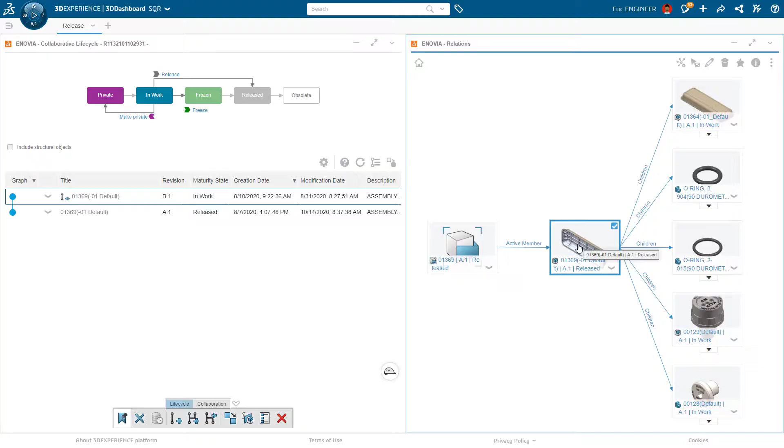Storing, managing, and collaborating on design data is a challenge every company faces. Now, with many more teams working remotely, there are questions on everyone's mind like, how can we securely centralize our data, improve collaboration, all while maintaining our design tool of choice, SOLIDWORKS.

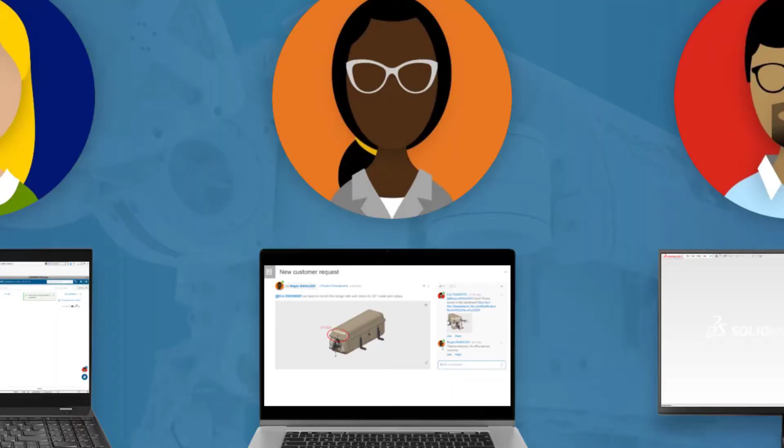Combining SOLIDWORKS with ENOVIA's out-of-the-box Cloud PLM is exactly what companies need to be productive right away. Let's follow a small design team to see what it looks like to connect SOLIDWORKS Desktop to the cloud.

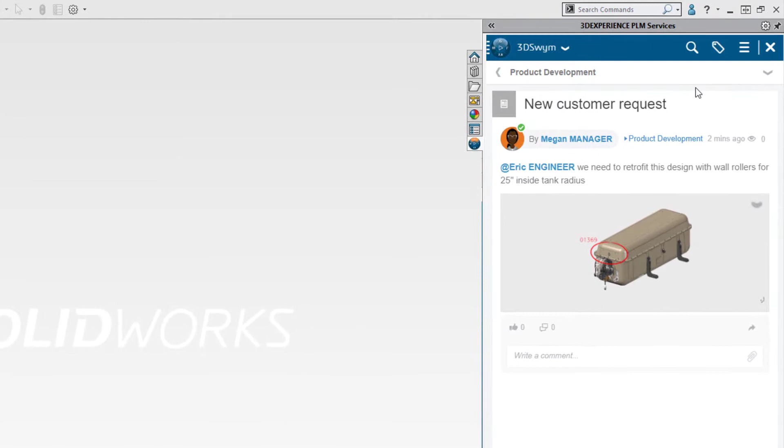Eric the engineer starts his day working in SOLIDWORKS Desktop. He logs into the 3D Experience platform and sees an incoming message notification. His manager, Megan, is asking him to modify an existing assembly for a new customer request. He searches for the related CAD model and drags it into his SOLIDWORKS session.

It's just that simple to access his SOLIDWORKS data that's stored on the 3D Experience platform. Marking the assembly as reserved gives him write access. He's made his design changes, but before saving back to the cloud, he wants to know where this assembly is used. The Relations window gives a graphical view of all the parent-child dependencies.

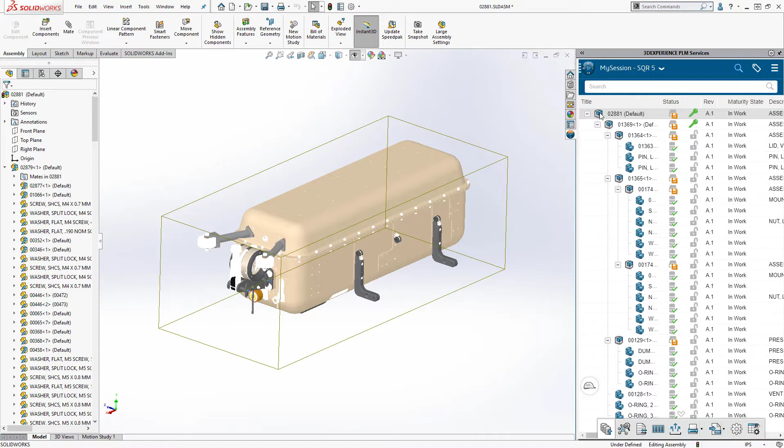Here's the top-level assembly, which he opens in lightweight mode. That's a big time saver for the large models Eric usually works with. With the full assembly up to date, he reserves it and clicks Save. Eric creates a new revision now that the rollers have been added.

Despite this being a pretty large assembly, save time is efficient because only the models that have changed need to be saved to the cloud. That was easy. In fact, his team was productive from day one because connecting their data to the cloud required no customization or special setup.

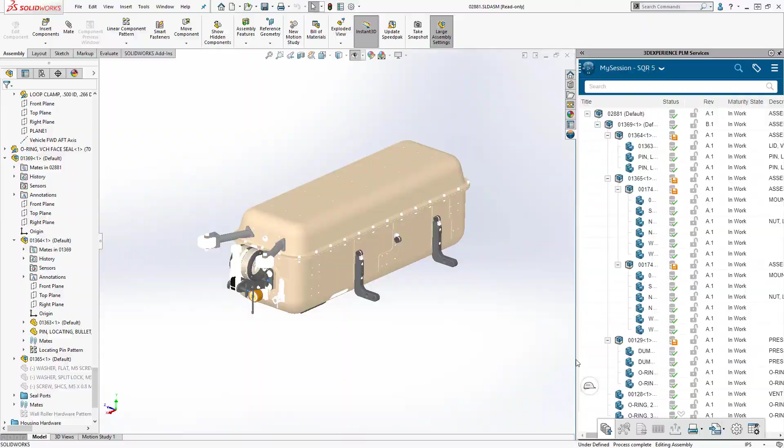Later on, Eric still has some work to do that doesn't require modeling in SOLIDWORKS. All his 3D Experience apps are accessible from any browser, and with his data safely in the cloud, he has the freedom and mobility to keep working from just about anywhere on any device.

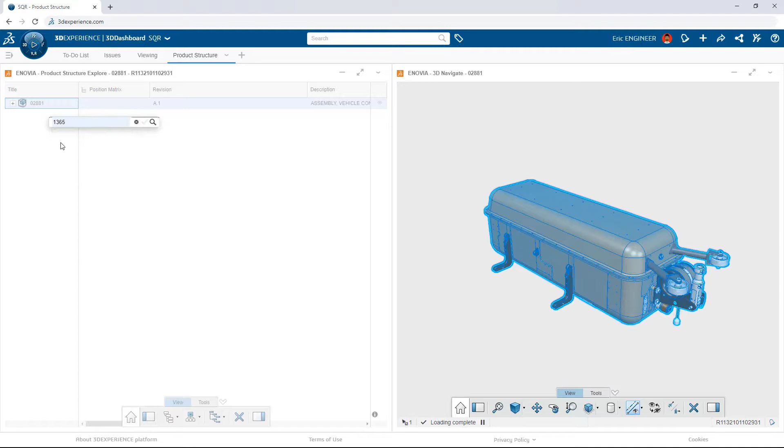He loads the top assembly into the Product Structure Explore. This app shows a graphical view and list view at the same time without tying up a CAD license. He filters the display to highlight the newly added roller assembly and attaches a supporting document, in this case a PDF with installation instructions.

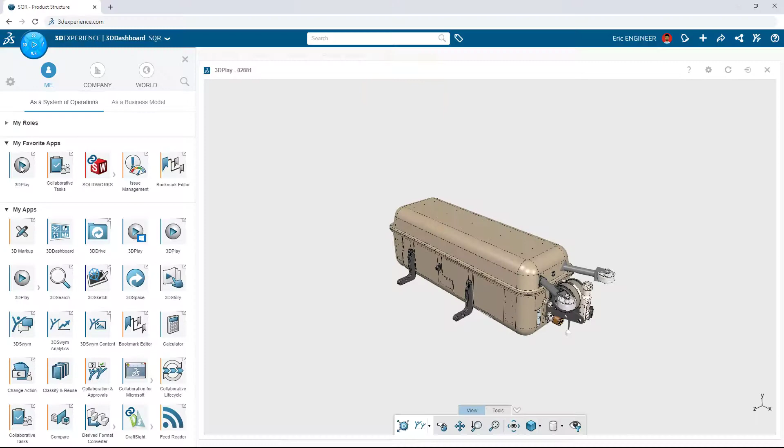Now it's time to give Megan an update on his progress. Instead of an email or phone call, Eric tailors an interactive dashboard that will have exactly the information he wants her to review. First, he adds the 3D Play viewing app, preloaded with the top-level assembly. He also grabs a screenshot he can post back to the discussion thread.

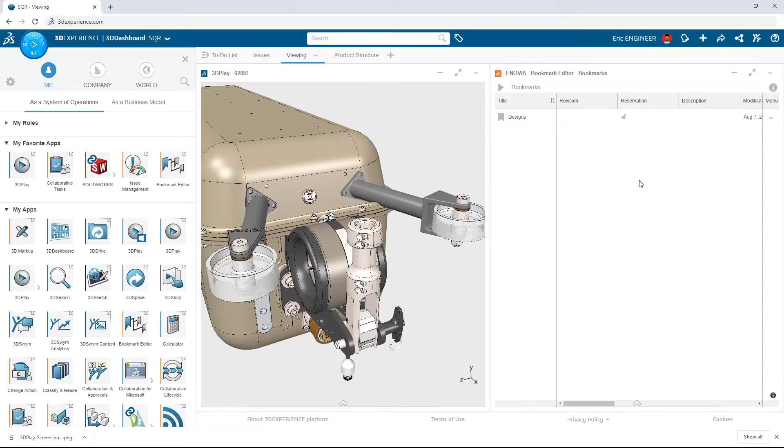Next, he launches the Bookmarks app, which is a convenient way of organizing shortcuts to frequently used items. His manager likes this because it keeps her most important data right at her fingertips. When he's ready to share the dashboard, he just copies the link.

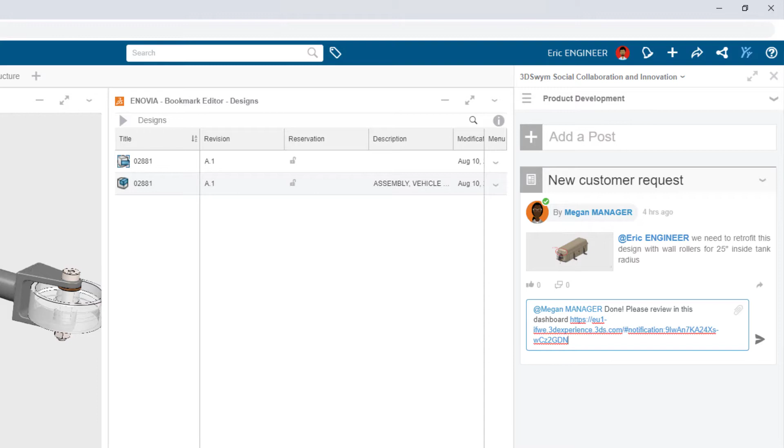Eric notifies his manager by posting back to the original discussion thread. He adds a comment, pastes the link to the shared dashboard, and inserts a screenshot of the latest design.

When you connect SOLIDWORKS to the 3DEXPERIENCE platform, it's the best of both worlds, cloud and desktop. SOLIDWORKS plus ENOVIA gives you a fast and easy way to store, manage, and share design data with the convenience and security of the cloud. There's little to no setup required, so you can be productive right away.

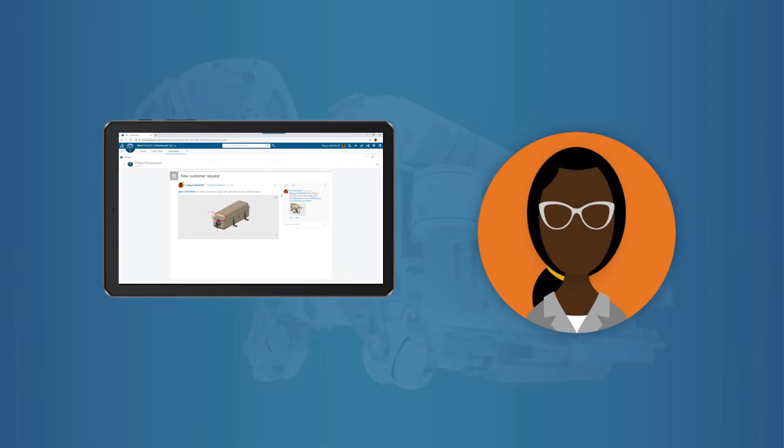Connecting SOLIDWORKS to the 3DEXPERIENCE platform provides an easy way for companies to store and secure their data on the cloud. But that's just the start. For non-CAD users like Megan, the engineering manager, it gives her a simple, browser-based approach to streamline collaboration. Let's see how she uses the 3DEXPERIENCE platform apps to manage her team's activities more efficiently.

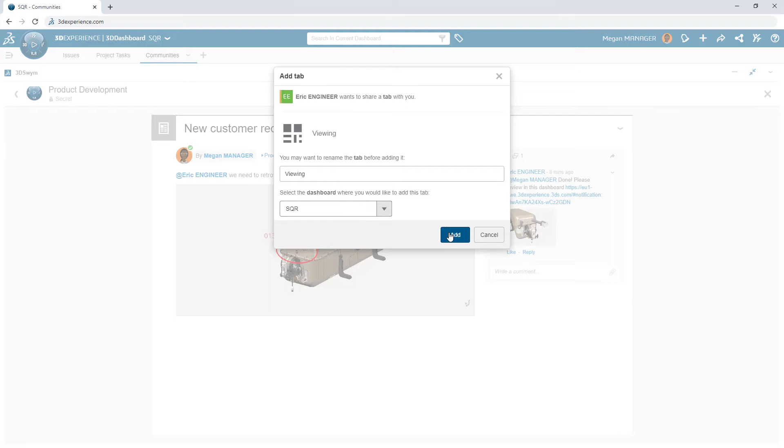Megan opens her browser and sees Eric has replied to her discussion thread requesting a new design proposal. He's included a link that she can add to her existing dashboard. The 3DPlay viewing app and Bookmarks app are preloaded with the data Megan needs to review his latest design. That saves her time and eliminates costly communication errors.

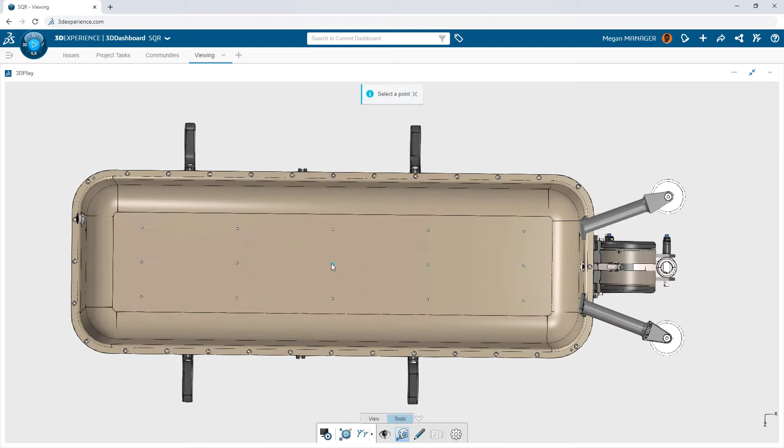Fully interactive viewing of even the most complex 3D models is a breeze on any device, especially touchscreens. There's no special hardware required and no CAD license needed. Megan uses a measure tool to verify the proper radius on the wall roller assembly.

Looking closer at the roller arms, she wonders if there might be excessive twisting without some kind of support member between them. So she logs an issue. It's just one of many ways the team can track problem reports or change requests.

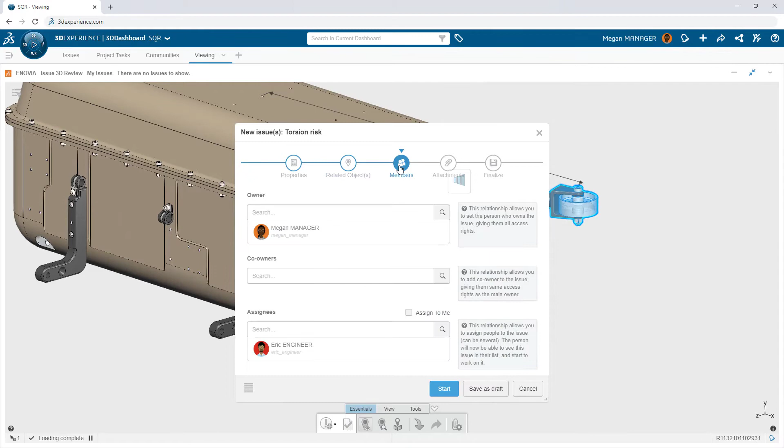She tags the related 3D models and assigns the issue to Eric, who will automatically be notified through the platform. No emails or phone calls required. It's such a more streamlined way to collaborate.

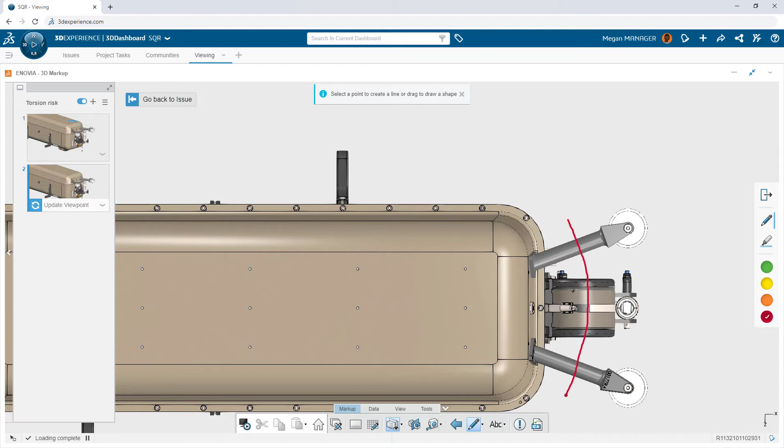To better document her idea, she can mark up the 3D model with various annotations in multiple views. This will give Eric a single source of truth as he gets to work on the redesign.

Meanwhile, Megan needs someone to add the hardware kit and create a drawing for the wheel roller assembly. She creates a task. It's like a self-contained to-do list with description and due date. She assigns it to Debbie Designer and attaches the proper SOLIDWORKS assembly so Debbie has everything she will need to get to work.

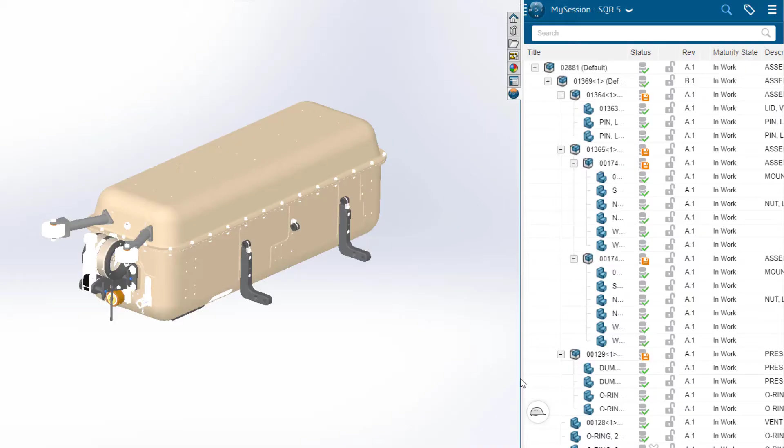Connecting SOLIDWORKS to the 3D Experience platform helps you streamline collaboration, all from a browser on any device with no software to install. You can extend the utility of your SOLIDWORKS data to non-CAD users and eliminate dozens of other disconnected solutions, improving productivity and providing clearer focus for everyone involved.

The 3D Experience platform is great for connecting SOLIDWORKS data to the cloud and improving collaboration, but when deadlines are tight, multiple designers often need to access the same SOLIDWORKS models at the same time. Not having proper write permission, accidentally overwriting someone else's work, these things happen all the time.

Eric and Debbie need to work in SOLIDWORKS on the same assembly, in parallel to meet their deadline. Let's see how ENOVIA's out-of-the-box PLM enables a more seamless, error-free approach to concurrent design. Debbie needs to add hardware and create a detailed drawing her manager can present to the customer. She uses her task list to organize the work that's been assigned to her, without ever leaving SOLIDWORKS.

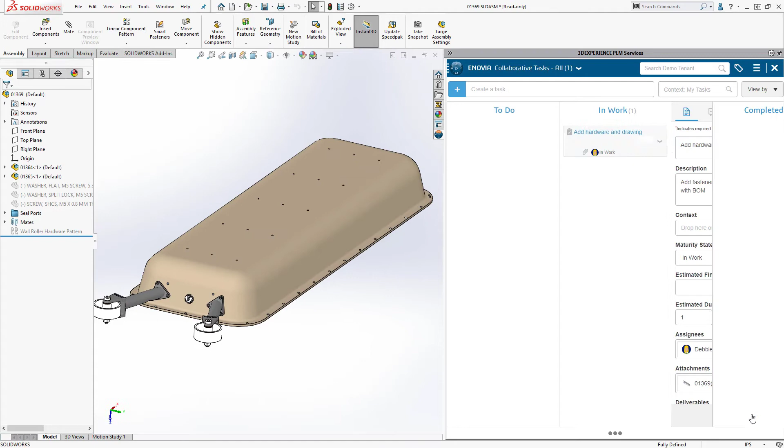Since Megan already attached the CAD assembly, Debbie won't have to waste time searching for files. She reserves the top-level assembly for write access. All the other subcomponents are still available for anyone else to work on. She's added the fastener kit and saves to the cloud, so any other users will be able to see her latest updates. Next, she lays out a 2D drawing with a bill of material.

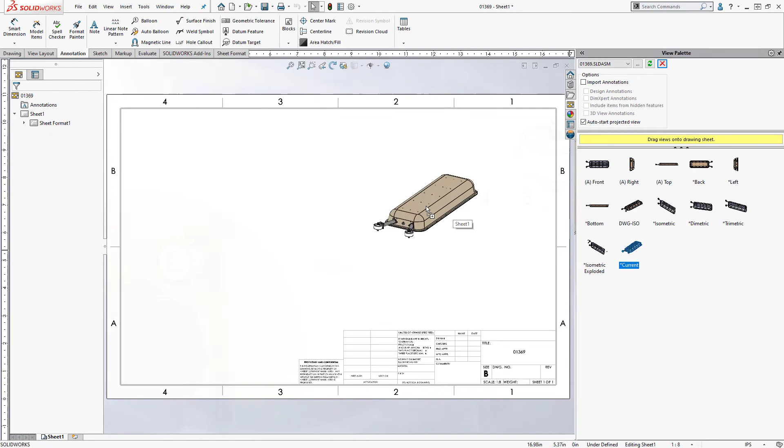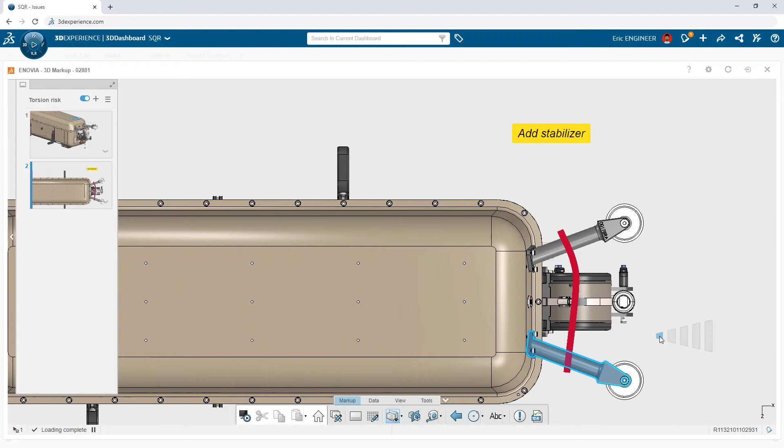Meanwhile, Eric has been assigned to tackle a structural issue with the design. The issue management app tracks the life cycle of the issue and provides a convenient way to organize and access all the associated data, all from his browser. He starts by reviewing the attached 3D markup. He sees the notes and clicks through the 3D geometry to verify the proper assembly, which he can open directly into SOLIDWORKS.

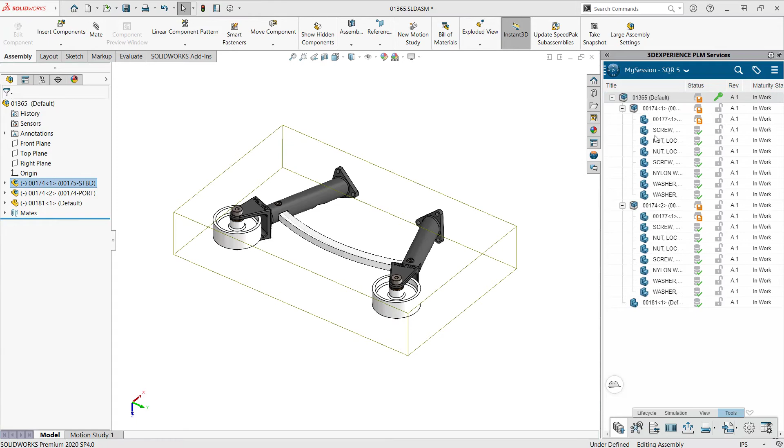Eric sees Debbie already has the assembly reserved. That's okay. At the same time, he reserves the roller assembly so he can add a stabilizer. There's no danger of overwriting each other's work. When he tries to save the assembly, he sees there are subcomponents that also need saving that he didn't reserve.

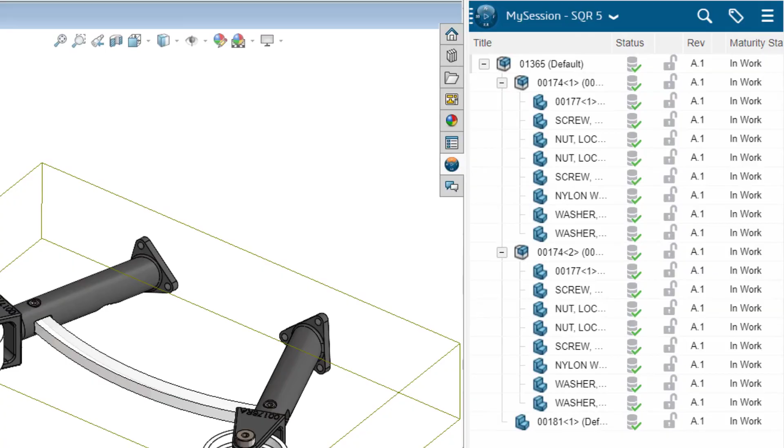With the 3D Experience platform, trouble-free data management is built right in. The software automatically gives write access to those additional files without interrupting anyone's workflow. Now the assembly is up to date and safely uploaded to the cloud. Back in his browser, Eric moves the issue status to in approval for Megan to review.

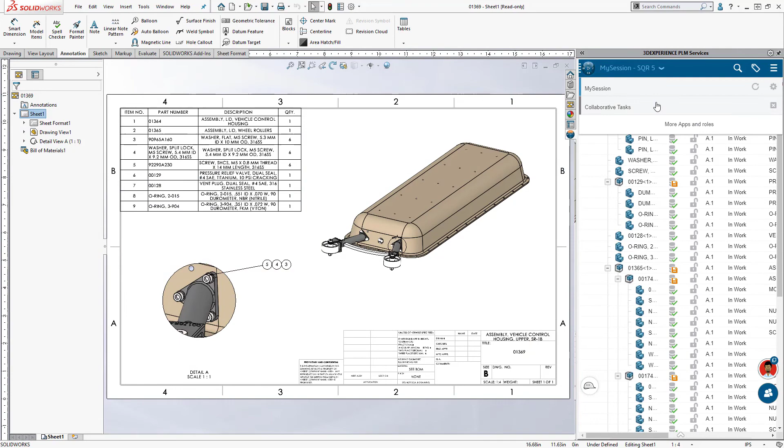Just as Debbie is finishing up her work, she gets an instant message from Eric. Debbie just needs to refresh to get the latest version from the server, and she's up to date, including the drawing. To close the loop, she returns to her task list, attaches the drawing, leaves a comment to notify Megan, and moves the task to completed, all without leaving her SOLIDWORKS design session.

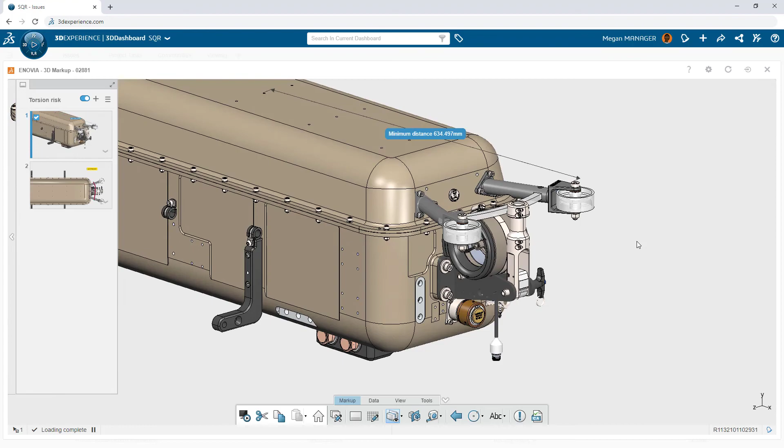Now back to Megan. First, she checks on the issue she assigned to Eric. The updated design is right there in her browser. Everything looks good, so she marks the issue as completed. Issue management on the 3D Experience platform turns out to be a great way for Megan's team to log the history of problems and change requests, a must for their highly regulated industry.

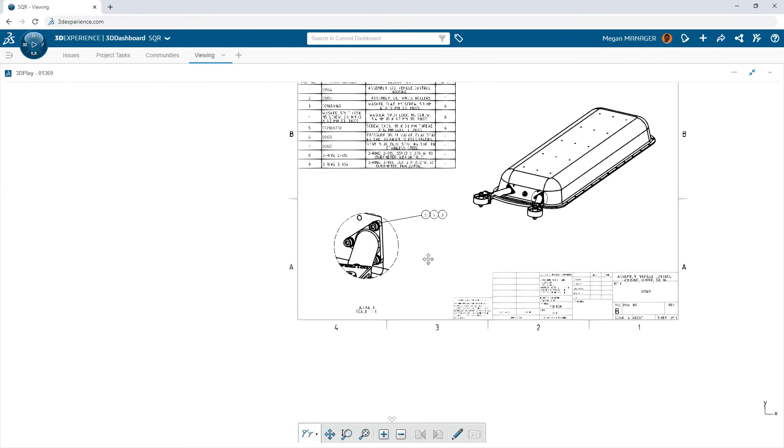But what about the drawing she needs? Debbie has already shared it with her, so she can drag it right into her viewer. It's exactly what she needs to show the concept to the customer. Finally, she marks the drawing as released so it can't be changed for the duration of the customer approval process.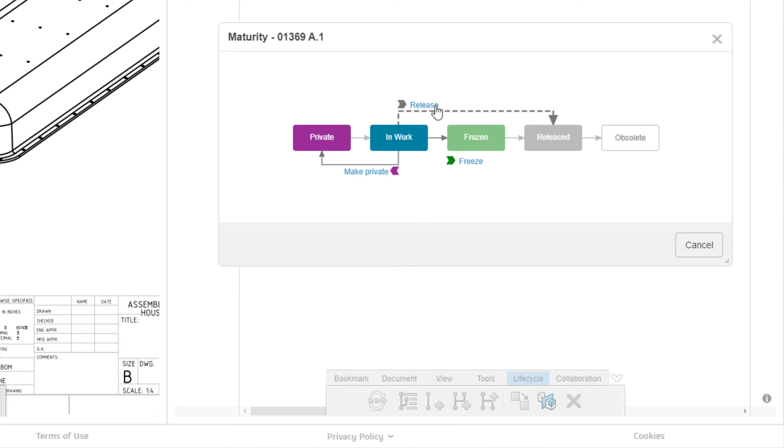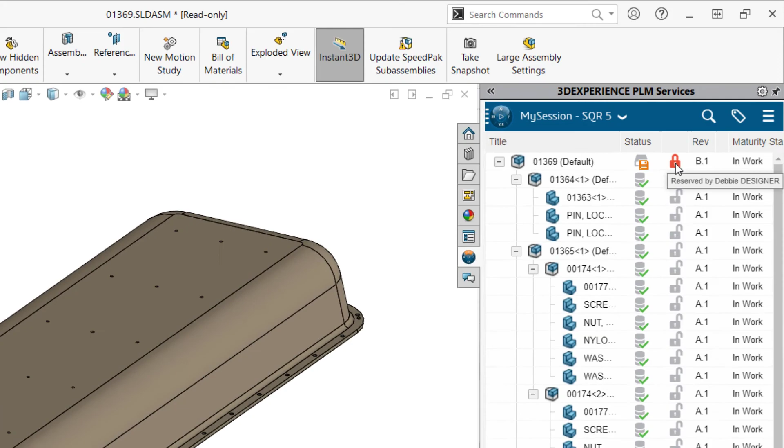Multiple designers accessing the same files simultaneously. We all know how tricky that can be with traditional file-based storage, but with SOLIDWORKS connected to the 3D Experience platform, concurrent design is easy because the PLM tools are ready to use out of the box. You can tell right away who's working on what, so you can avoid common problems like permissions issues, version mismatches, and accidental overwrites. And when there are changes, the various notification tools built into the 3D Experience platform keep everyone in the loop, so you can design faster together with fewer errors.